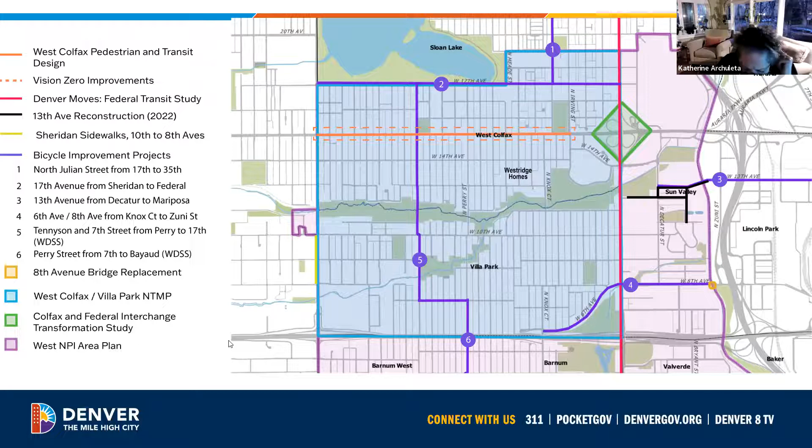So we're going to turn it over to Mike, who's going to update us on Vision Zero. Great, thank you Katherine and Beth.

And thanks everybody for joining us tonight. For those that saw this presentation a couple of weeks back, this is pretty similar to what you've all seen, but for the new people, feel free to ask any questions you have. Before I dive in, I do want to introduce myself. My name is Mike King. I'm on the Vision Zero team, and I'm a senior city planner here at DOTI.

And yes, we'll be talking about the West Colfax improvements—these are the short-term West Colfax improvements. Here's a quick context map of where these improvements will be happening, because West Colfax is a long stretch of corridor. We're primarily focusing on West Colfax between Sheridan and Irving. This location was identified because it's on Denver's high injury network, it's a high priority area for DOTI's equity index, and there's been a significant increase in crashes over the last three or four years.

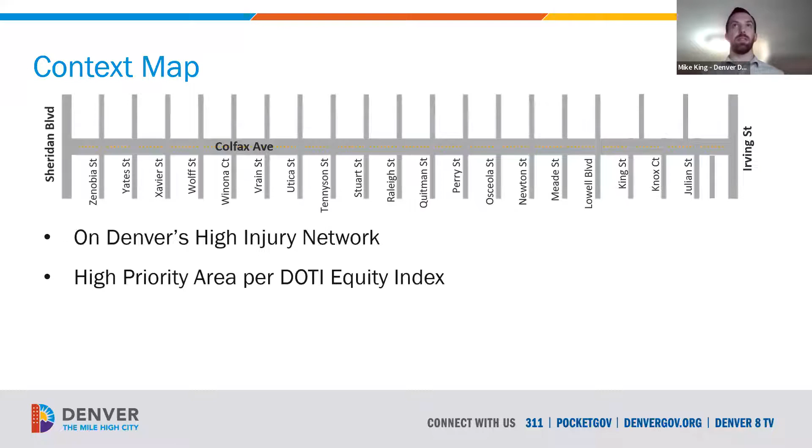So the overall goal for this project is to install paint and posts and near-term improvements. These improvements will look similar to the longer-term project with the PED transit project coming in about 2024—primarily a painted median and bulb-outs using paint and post improvements. A paint and post improvement is what you've seen on East Colfax or some of our protected bike lanes: flex plastic posts and painted medians on the corridor. This project was identified because of that increased crash picture I mentioned, and I'll show you some data on that. The goal is to complete the design and installation by the end of Q3 of 2022.

Mike, can we stop there to see if there are any questions or comments on that information you just gave? Anybody? I think I saw something coming in the chat, not sure if it's for this yet. I don't think so—okay, I don't see anybody's hands up. Great, okay, thank you everybody.

So where this really came from—again, the crash picture was the biggest piece of this, but there are a lot of different aligned efforts going on at the same time. First and foremost, the West Colfax pedestrian crossing and transit improvement project is the longer-term version of this. The Vision Zero team wanted to come in and install these quick-win treatments because we've seen that higher crash picture. If you wanted to hear more about that project, we're not presenting on it tonight, but it will be presented on in future meetings.

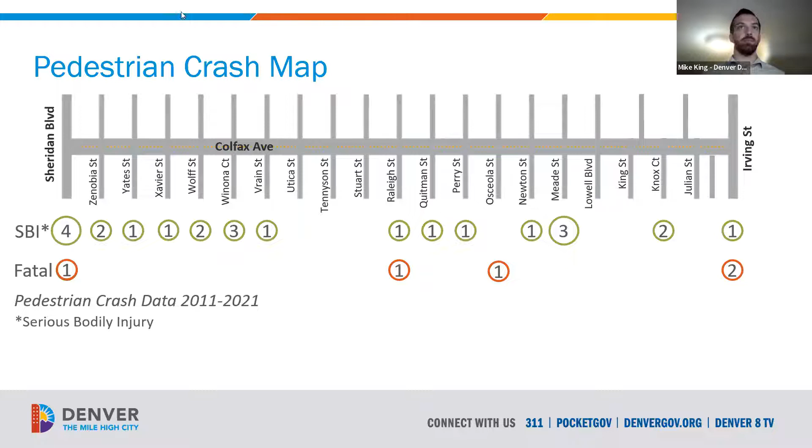Questions or comments? Should we keep moving? There's one more slide on crashes, Katherine. Okay, and I think that'd be a good spot. Sorry, no, sorry, that's fine.

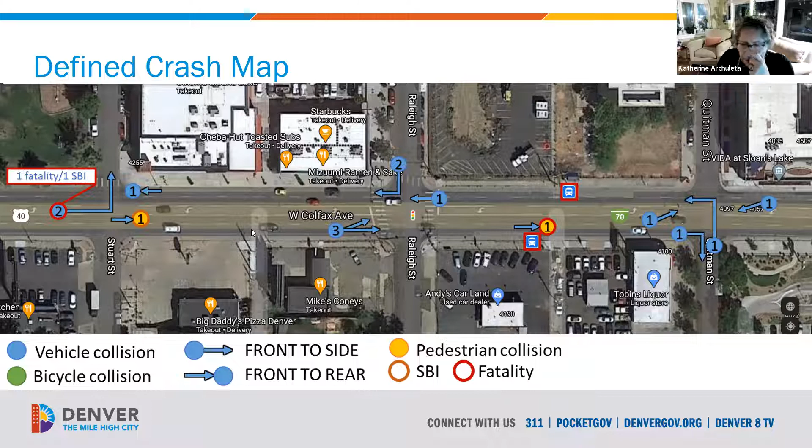Anything in blue would be white paint on the street, and the red dots are those flex posts that you'll see on protected bike lanes on East Colfax—the same strategy will be used here. The benefit of these bulb outs is, one, it slows vehicles turning, which benefits not only pedestrians but also other vehicles on the roadway. It also shortens the distance to cross the street for pedestrians. This was originally a 34-foot crossing in that bottom corner, and we reduced that by 7 feet by just installing that quick win paint and post treatment. A lot of these will be reinforced with the later project down the line.

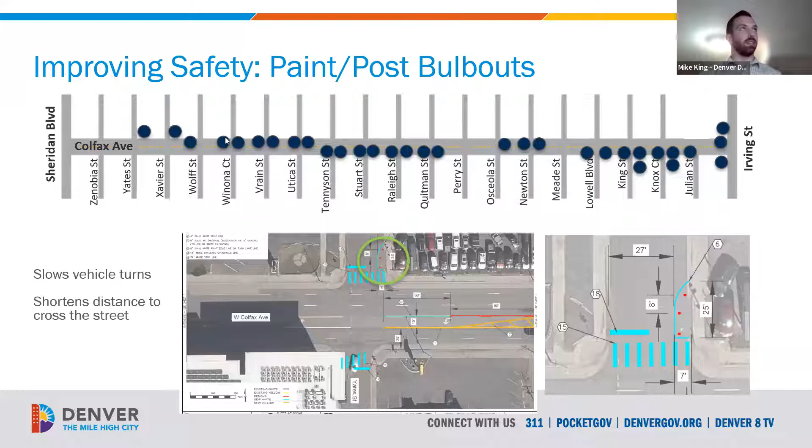The one last piece coming from this project, as you can see here, is that we will be painting crosswalks on all of our parallel streets to Colfax as well. And if there is already an existing crosswalk, we'll be refreshing it if needed.

So with that, I'd like to open up the questions. Just real quick, the next steps for this—we're looking to install these in Q3 of this year. Later down the line, you'll see more about the longer term project and how this will play into that as more of a pilot study in the long run. But yes, feel free to ask away any questions you all have.

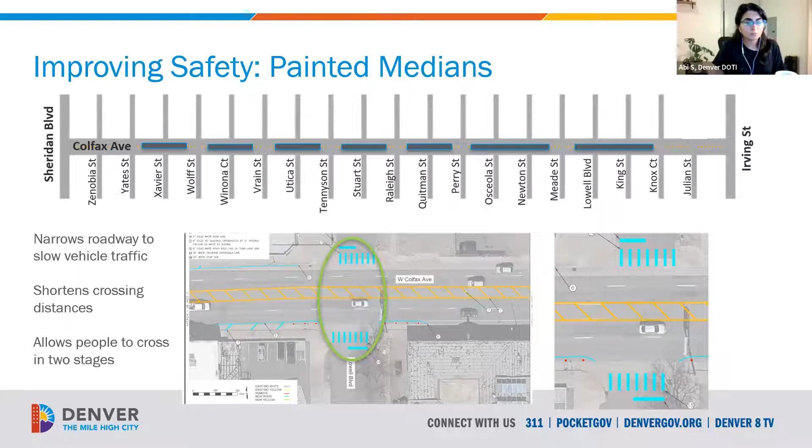Yeah, thank you so much. And again, would love it if we could see some stuff on the northeast and southeast sides as well - those are the really busy ones where the gentleman from our neighborhood was killed last year. So again, any of this is great, but thank you so much.

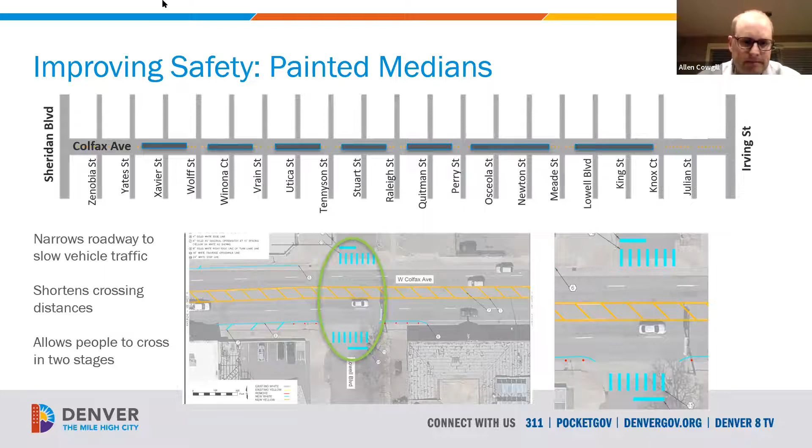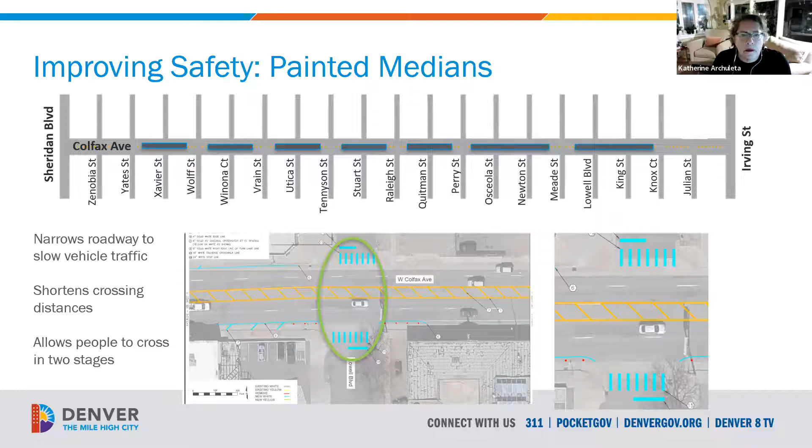Their comments on Jonathan has some comments in the chat there, Mike. I did write those intentionally just to not distract from the timeline of the meeting. I think that they can probably just be logged separately. Okay, Jonathan, and Mike can get back with you. Thanks, I appreciate the consideration. I know we're trying to

Acknowledge all of your questions and comments. So we're going to move to Karen, and Karen's going to talk about the 17th Avenue repaving and bikeway projects.

Hi all, we've got a ridiculous amount of information, and yet also want you to have a big opportunity to ask questions. So I'm going to go through some of the preliminary information really fast, or even skip some slides so we can focus in on the project information, and we can go back to some of that as needed. I'm just going to hit the highlights, so get ready for a little bit of a speed show.

I'm Karen Good from Denver's Department of Transportation and Infrastructure. I have Steve, Allison, and Taylor with me today to help answer any questions. Please do put those in the chat and we'll answer as needed. So let's go.

Big picture, you've heard a lot of information about safety. We want to make sure we're providing safety on 17th, thinking about that multimodal safety and providing people with choice so that they are looking at the opportunity to travel in different ways around our city. We want to encourage more people to walk and bike. Big picture, you've seen that before.

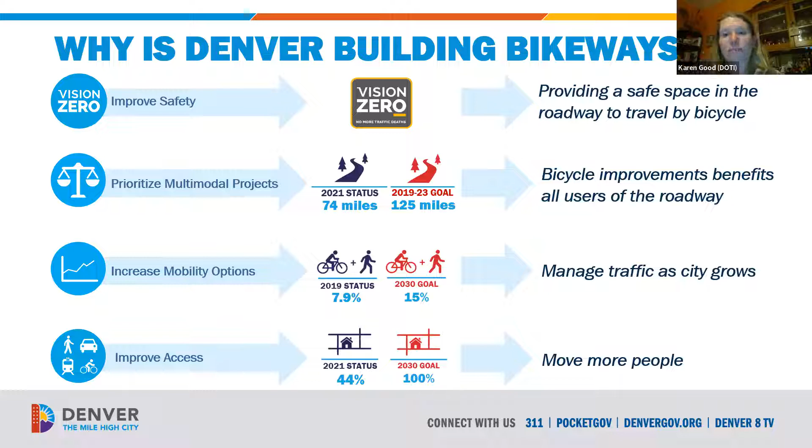Let's keep rolling. And big picture, people always ask, well, if you have a bike lane, why would you want to do something more than a bike lane or something different? It goes into this interested but concerned area. Folks that are, Alan, I know you're probably in this highly confident area. John, I know we've got a lot of confident cyclists here. Then we've got some folks that are somewhat confident. We've got a huge number of people, almost 60%, that are interested and concerned.

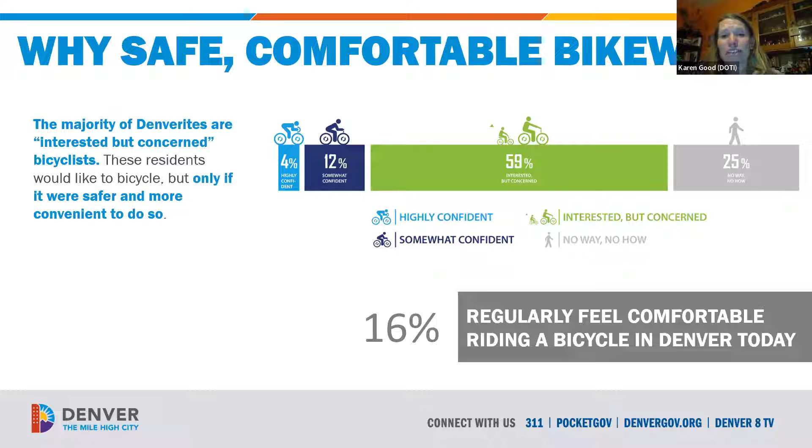The more that we can provide, the more that we can get facilities that really make people feel confident and comfortable. We're at a huge percentage of people, 75% of people who would potentially ride a bike in Denver. And keep in mind that our bike improvements also tend to slow traffic and provide better opportunities for pedestrians.

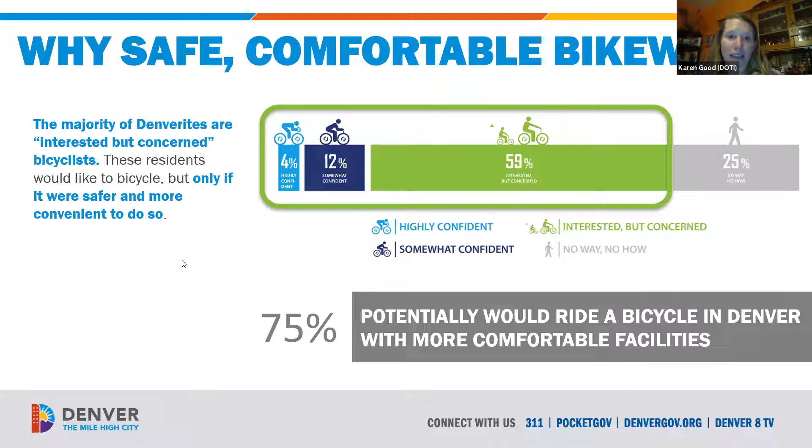So let's zoom along, and Catherine, please stop me if we want to dive in or if there's anything in chat. So the big thing that we're doing here is that 17th is being repaved. Steve is the project manager for that. When we repave, we want to be really efficient with our funds and do it once and do it right. So our goal is when we have a paving project to look at what we can do if we want to change any of the bike facilities on the street, and get that incorporated into the paving project. So that's why we're here to talk about 17th. Next slide, let's just stop there. Thank you.

Karen, just to be sure if anybody has any questions on these first five slides that we produced. Just we're going to go into 17th Avenue, and just want to be sure that as we set it up, that there aren't any initial questions.

And it looks like Jonathan had, it's like they're popping up really fast, but Taylor, it looks like you answered a question from Jonathan in the chat. Do you want to share his question and the answer so everyone can hear that?

Jonathan was asking if we can get the speed pillars and raised crosswalks installed sooner when we have funding. I replied that yes, it is frustrating that we can't do them right now. Long term, we're hoping to upgrade our quick-build installs of neighborhood bikeways and other bikeways to have these elements, but currently we're trying to build out a safe and connected network across Denver rather than a few more expensive bikeways in fewer parts of town.

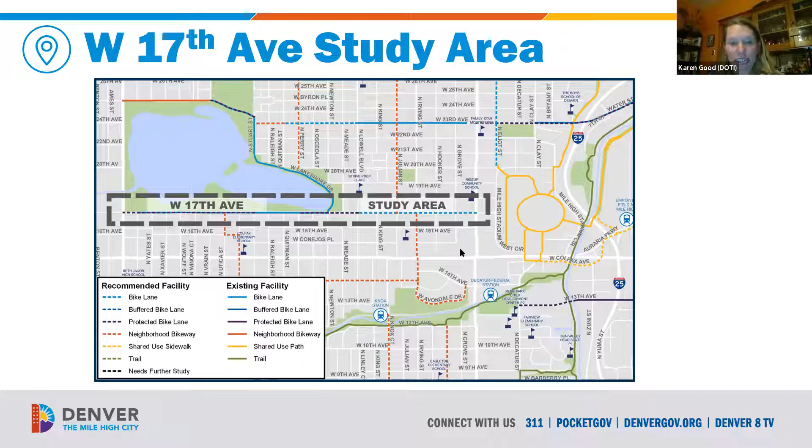So, next slide. From Sheridan to Meade, this is the cross section. I want to focus on the picture because I think folks are familiar with the fact that there's a bus going down, but we do have parking on one side of the street and existing bike lanes.

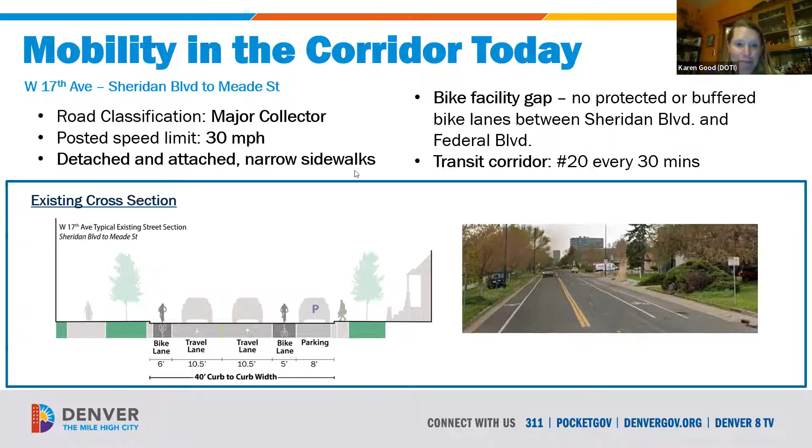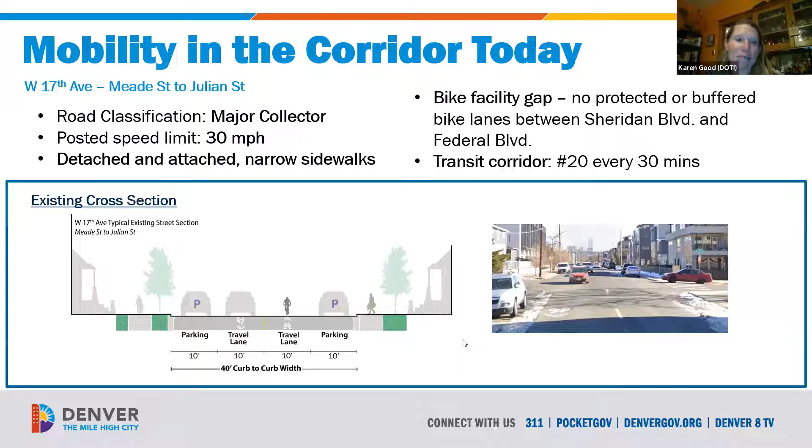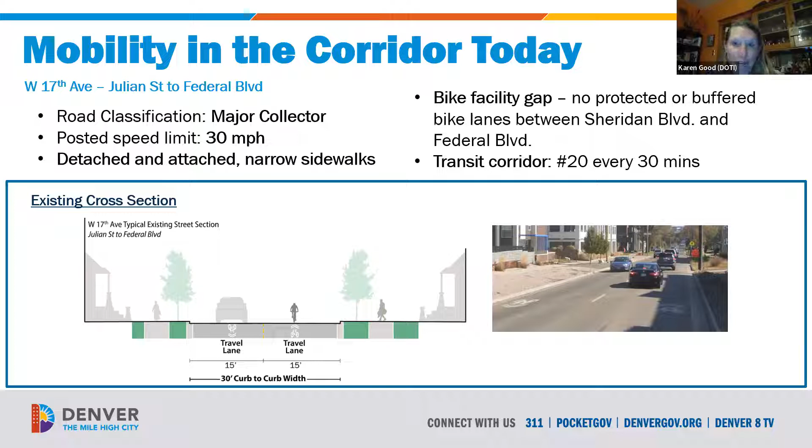This is interesting in that in the distance between Federal and Sheridan, there are essentially 3 different cross sections. Between Meade and Julian, for that short segment, there's parking on both sides of the street, travel lanes with those shared lane arrows, meaning bikes and cars share the same space. You can see that in the picture. Our final cross section, existing between Julian and Federal, has wide travel lanes with sharrows and no parking. That's the big picture of where we are now.

Somebody looking at these earlier asked, wait, is that what we're recommending? Nope, that's what's there now.

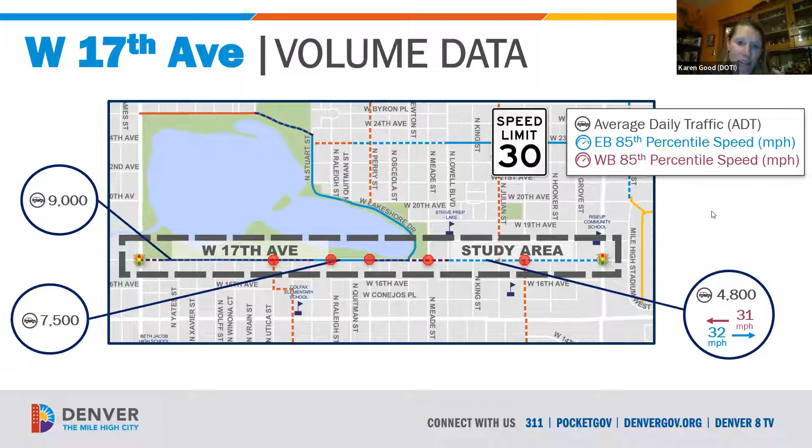So we did an analysis of the volume. The volumes between Meade and Federal are lower than those between Meade and Sheridan. We'll jump through this and can go back if anyone has detailed questions. If we can go to the next slide.

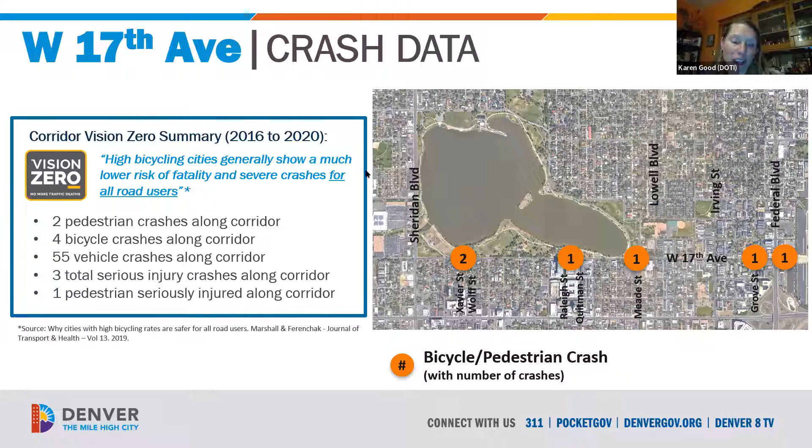We also have crash data at Xavier, Raleigh, Meade, and Grove. We took this information into account, and the next slide should show our parking data. We were focused - we had some older data and got new data this February that really focused on residential use of parking. The black

Let's pop to the next slide so we can get into more detail of what we're looking at doing here. Karen, do we want to pause before we go to the design? Yeah, I wanted to speak to - I think we have James and John asking about sharrows and how their partners are too uncomfortable to ride on streets with sharrows. Yes, that is the current existing condition of West 17th, where there are sharrows - that's not what we would call a neighborhood bikeway, what I was describing earlier. Exactly, so the future neighborhood bikeways will include...

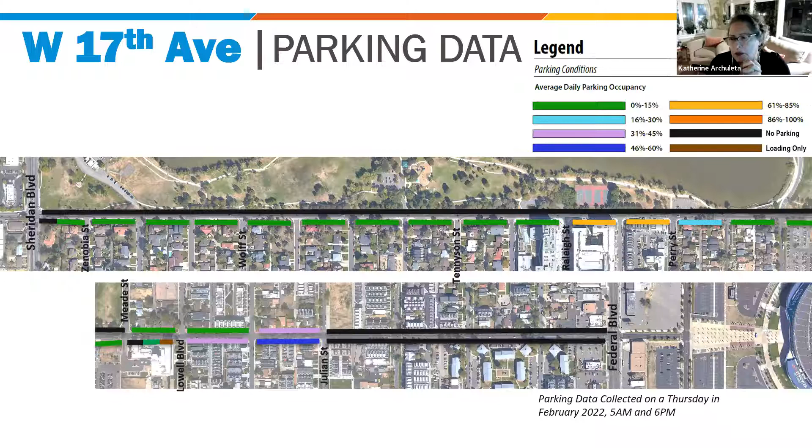So we're almost there. Let me pose a question that might encompass all of the questions we have. As you've taken this data, you've gathered a lot, looking at parking data and many different things. Am I right to say that all of that data has been towards informing the design? We're not looking at just one thing, we're looking at a lot of things in order to inform the design. Let's go to the next slide, because I think that's critical, and that brings in what you're talking about.

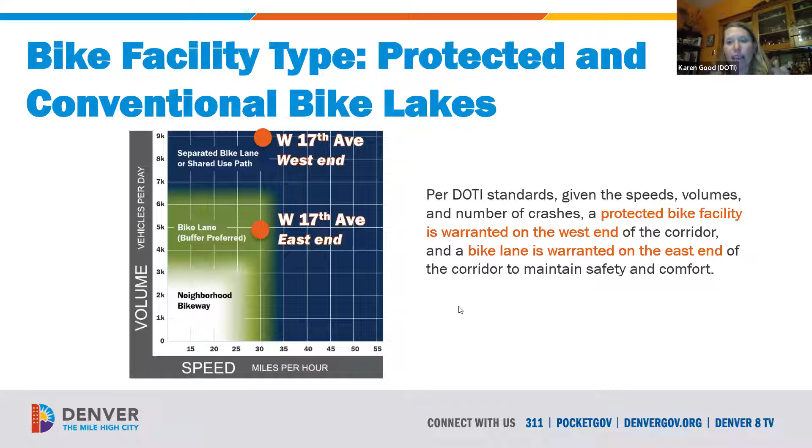We look at the speed and volume of the street to help identify the best thing to do for the area. This graphic gives you that idea. We're looking at the intersection of speed and volume. As I was describing, the east and west ends of 17th have different speeds and volumes. When we look at the west end, that tells us it's best to consider a separated bike lane or a shared use path. The east end is in the green zone where we'd want a bike lane, potentially even with a buffer. So exactly to your point, we use that data, and it suggests what we'd want to do in the future. All we've done now is shown you the existing conditions and the data. This is a pretty good clue as to what we're recommending for the future conditions of the east and west sides - a separated bike lane and a bike lane. We have graphics that show those cross sections.

I know that DOTI is extremely interested in getting community comment. How has community comment and engagement played a role up to date? How is that informed in your data collection, what you're about ready to describe to us? We know that this is part of that community engagement process.

Absolutely. I just had three check-ins with folks today in our office hours. We have office hours. We presented about a month ago to the West Colfax CAG and got some feedback there. We've been doing outreach through our bike program and the West Colfax planning initiative, so we've got a lot of feedback coming in. Some concerns we've heard are about parking. Other concerns are, as we've heard tonight, that a sharrow isn't enough and people don't feel comfortable in it. So we have this meeting, and then the day before St. Patty's Day, we'll be out at Sloan's Lake, or depending on weather, at Odell Brewing Company, getting feedback with a pop-up meeting.

We're not here with a set design. We're here to show people what we're thinking. You can see there's just a big square around the east side - we're looking at a bike lane - and on the west side, we're looking at a buffered or protected bike lane with horizontal buffer and vertical elements as well. So that's the big picture, but we don't have a finalized design. We want to get feedback from everyone and hear what some of the challenges are so that we can put a design together that works, that's safe, works for the community, and provides for our goals.

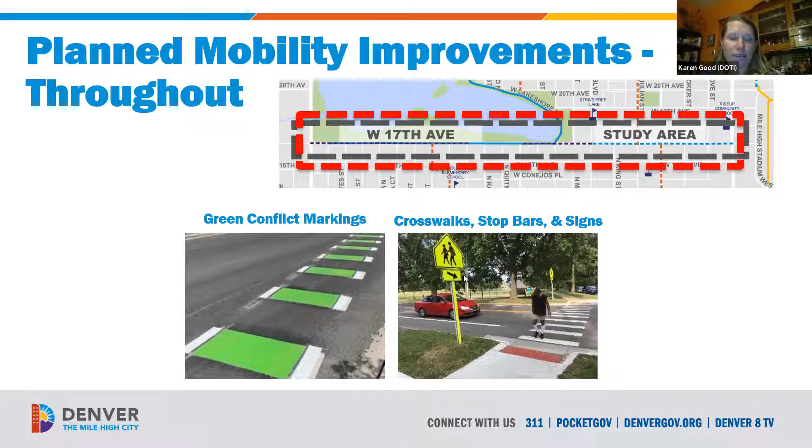Okay, and then I think we do have our timeline slide, Beth. I think you guys are pretty aware of the project benefits, so we'll bop forward to where we are. We're in our educate and understand phase so that we can get to design in May. I mentioned that pop-up on the 16th, we'd love to see folks there. And we do have our office hours as well as our email. We'll finish design in late spring and then install in summer with the paving.

And our final slide should be our contact information, which I want to make sure everyone has. I know a lot of you have probably used the bikes at denvergov.org, our project website, and that's where you can also sign up for office hours.